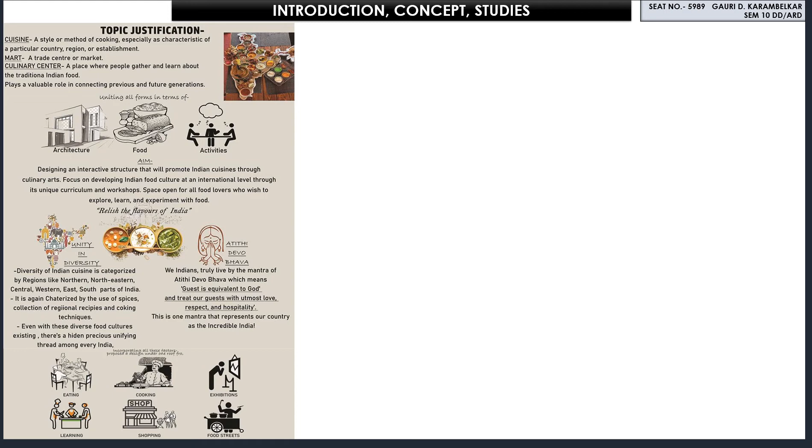Aim is to design an interactive structure that will promote Indian cuisines through culinary arts, focusing on developing Indian food culture at an international level through its unique curriculum and workshops. The space is open for all food lovers who wish to explore, learn and experiment with food. These are more of the social and national, international reasons.

Concept: as we know, the Indian subcontinent comprises 6 administrative divisions, so resembling of triangles concludes into a hexagonal form. Keeping in mind future expansion, this form can easily be adopted.

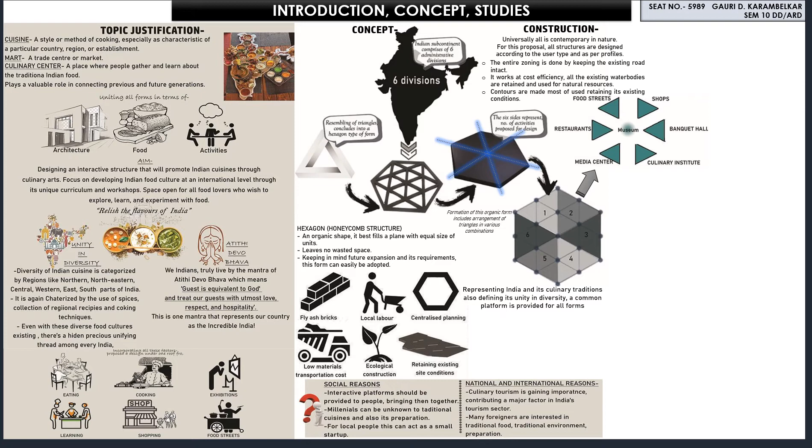Construction is universally contemporary in nature. All the structures are designed according to the user type and as per profiles. Zoning: the program is related to all age groups, local vendors, food related organizations, students and chefs.

Electives: 3 topics have been studied as an add-on — smart technology and its role in restaurants, organic waste management, and green restaurants. So this process includes aspects such as physical, social, cultural, economical, spiritual and aesthetic place.

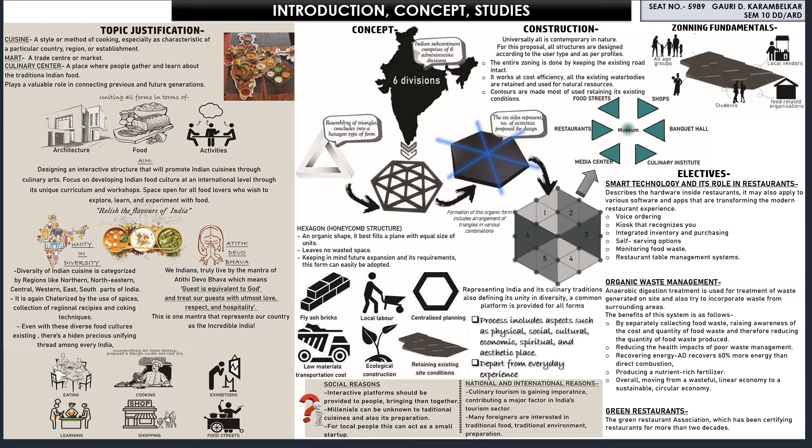Depart from everyday experience — site conditions. Creating a culinary hub requires more visitors with varying profiles. Selecting a site adjacent to main connecting city highways provides chances of increase in the number of visitors. Site potentiality depends upon the thoroughfare potential, surroundings — natural as well as man-made — future proposals, and more accessibility options. Previously, 3 sites were taken into consideration.

One at Mumbai-Pune Expressway, second at Mumbai-Goa Highway, and third at Mumbai-Agra Highway. Considering accessibility, proximity to nearer cities, transport services, natural surroundings, and daily number of vehicles passing from the adjoining road, the site at Bhatan and Bhinganwadi was finalized, which is on the Mumbai-Pune Expressway.

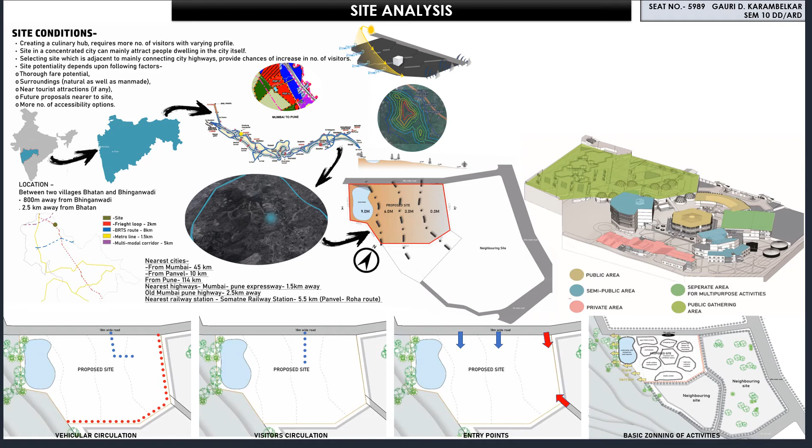Site zoning in terms of public, semi-public, private and other areas is explained. These are some of the site images surrounding the site. Vehicular circulation, visitor circulation, entry points and basic zoning of activities are explained graphically.

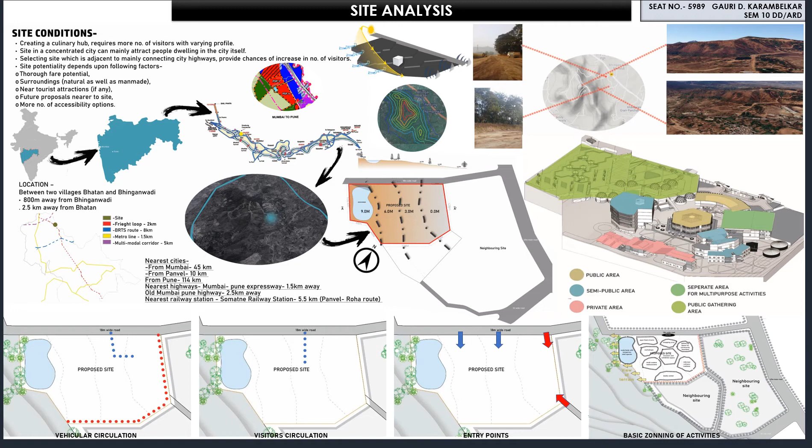A detailed site description with natural and built surroundings is shown. Further site components such as green spaces, services, parking, water bodies with built forms are marked. Interventions from climate analysis in the design are explained.

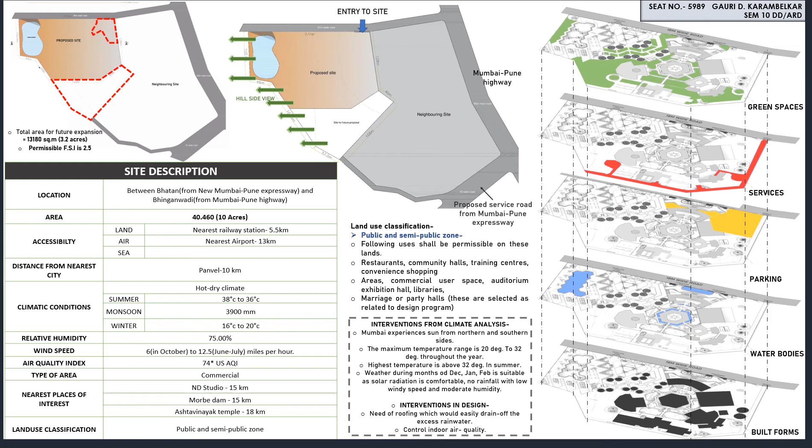Site zoning, showing pattern grid for planning with reference to triangular arrangement. Site with contours; further the site is divided into 6 parts.

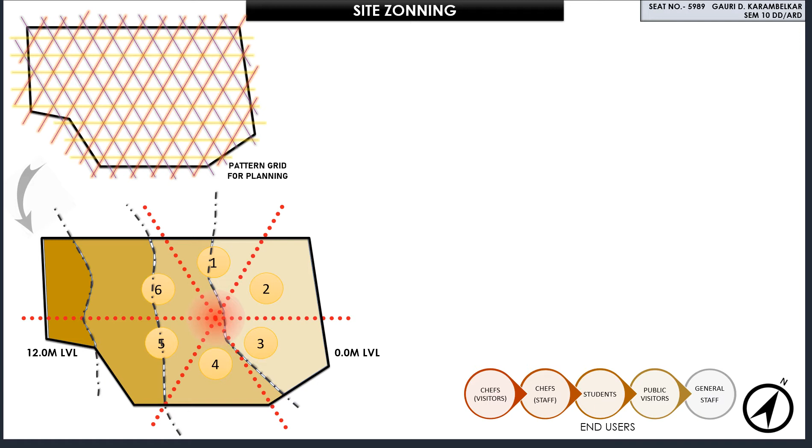Moving towards the zoning of the site, starting with the entry to site at 3-meter level, the main road leads towards the parking at 0-meter level below the banquet. After parking the vehicle, the visitor will come at the 3-meter level and start from the shopping arcade.

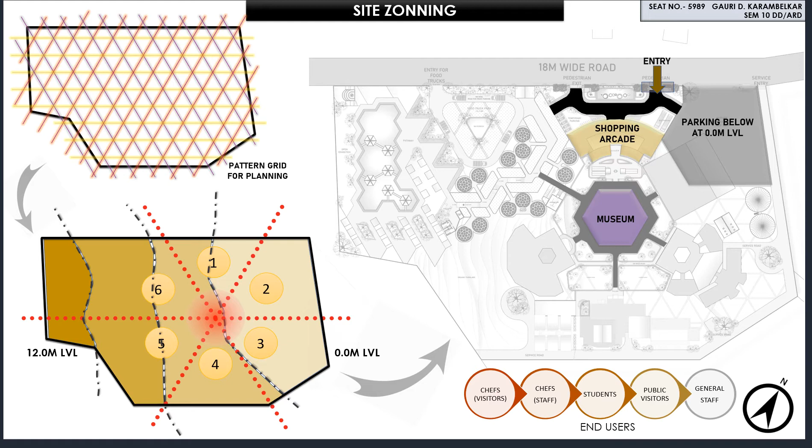Moving straight through, a person will enter the museum. This is the main road surrounding the museum, that is, the pathway towards all other structures from the museum itself. The banquet has a separate entry and exit, so a person need not enter the museum.

Culinary Institute, Media Center, restaurants, food truck park, water body with temporary shops. Exit again at 3-meter level. This is another entry-exit for the food truck park. A service road connects all the structures at the backside.

Sub-temporary parking spaces — as the site is on the main highway, a person can come only to the restaurant, grab a bite and go. These are small pockets for buggy vehicles and bicycle parking, as well as recharge stations. Overall, this type of zoning shows versatility and variability of activities.

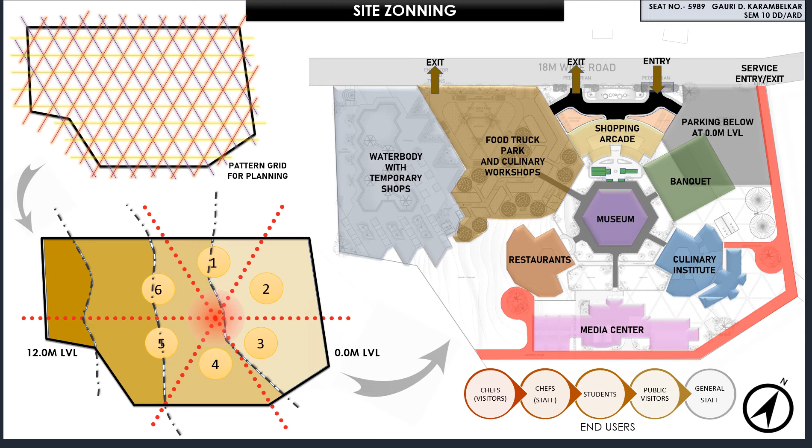Site plan with roof — this shows detailed roof profiles of all the structures on site. It explains the built and unbuilt ratio on site. Mostly, all the structures are designed with flat roof and contemporary facades as per use.

Contour levels and hierarchy of the structures are considered. Organic farms with vacant land are with respect to the contours. Besides, there is an activity mapping for the whole site.

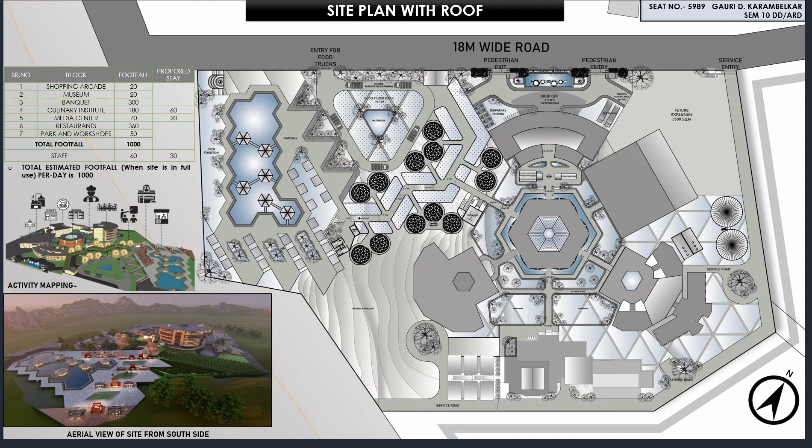Site ground floor plan showing structures and their arrangement according to the contours. It explains the overall circulation pattern.

With reference to the footfall calculations, further parking calculations are carried out. Valet parking is proposed for visitors, with 160 four-wheelers and 52 two-wheelers.

A separate entry and exit with a drop-off point for outside vehicles is proposed. The parking layout includes a lift and staircase to access the upper levels.

The entrance area at 3-meter level includes entry and exit to the site with a pedestrian pathway and drop-off point. It also includes valet parking registration rooms on both sides.

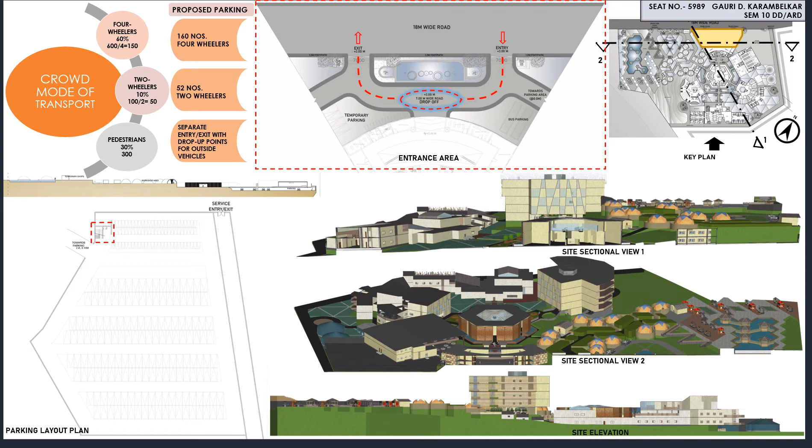Site sectional views, with one site elevation from the back side, showing the hierarchy of the structures.

Shopping arcade — the first block after entering the site at 3-meter level. This shopping arcade includes specialized shops related to the theme. A person starting his tour through this block gets an overall idea. This arrangement increases the sellability factor.

It also has an admin office and control rooms. The ground floor is the stop point for visitors right after entering the structure. It consists of ready-to-eat traditional spices, raw product shops, and first aid facility.

The administration area is proposed at the back side of the arcade. The first floor is an extension to the arcade, and it consists of books, textiles and cutlery shops.

Semi-open sloped roof for the courtyard space provides natural light and ventilation to the interiors of the structure. The facade is treated with a wooden textured perforated metal jali, detailed in the ARD. The front elevation shows this facade treatment with perforated metal jali placed vertically.

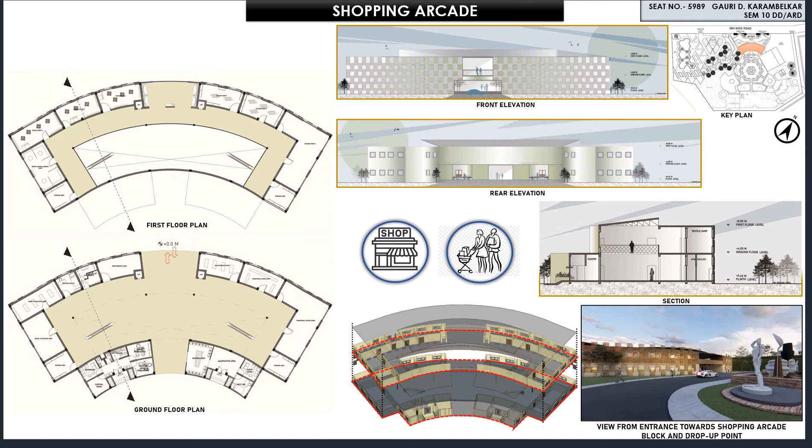The rear elevation shows entry to the back-end admin office and arcade. The section shows the central courtyard space with shops arranged around it.

Culinary Museum: centrally located, the museum reflects uniformity from all sides. Its facade is treated with slightly tilted perforated metal panels, and it is surrounded with an artificial water body that creates a pathway to all blocks on the site.

The ground floor consists of seminar rooms and exhibition spaces, more concerned with learning, and this museum provides access pathways to all blocks on site. The first floor consists of experimental activities such as smell synthesizers and tasting bars, with AV rooms giving a digital platform to the culinary aspects.

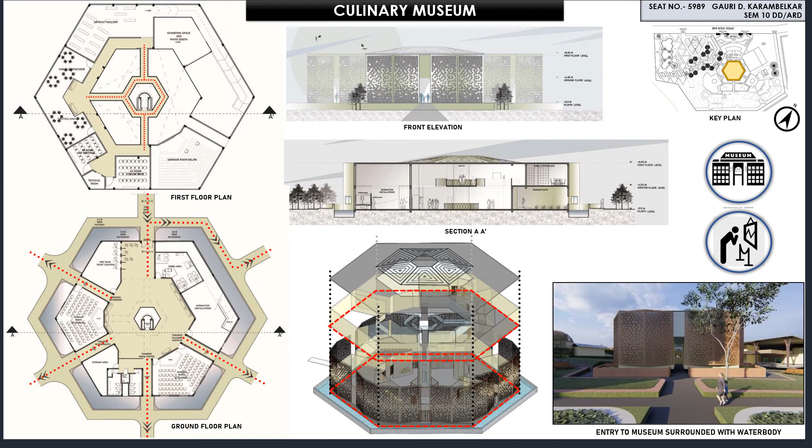At the end of the tour, access is given to the exhibition space and museum on the ground floor. Floors are vertically connected with a glass capsule lift, and a central glass covering acts as a courtyard bringing in natural light.

The front elevation shows facade treatment with perforated metal jali. The section explains the exhibition space with double height and a ramp. The central space has a glass lift and walkway towards other structures, along with a seminar room and activity area.

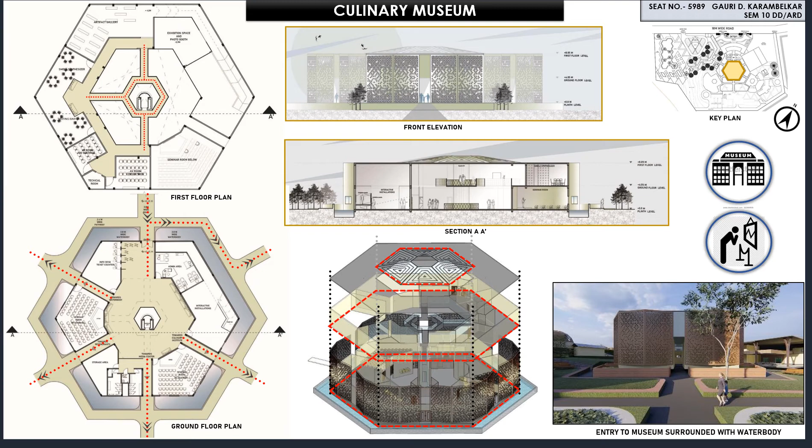Banquet: proposed above the parking area at the 3-meter level. This block is restricted for entry and exit from other structures on site. It has a banquet hall, part of the food family, with an extended multipurpose space.

The ground floor includes foldable, moving acoustic partitions so the space can be used as required at specific times. There are two banquet halls with 150 seatings each, and two kitchens serving the respective banquets.

Dining arrangements are in the exteriors, with green rooms at either side of the space. The first floor has an increased multipurpose space with dining arrangement.

A perforated polycarbonate sheet is used for the roofing system, with V-shaped steel columns supporting the roof for aesthetics and stability. The sectional view shows seating for both floors and the green rooms, while the elevation shows the V-shaped steel columns and the dining arrangement at the front side.

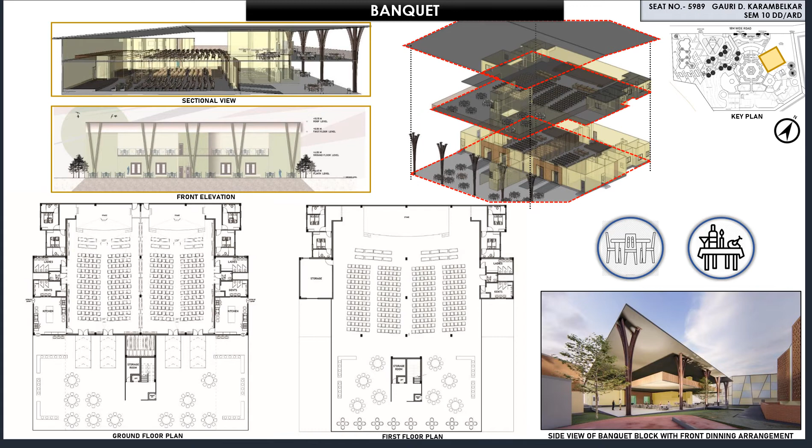Culinary Institute: entry at the 3-meter level. This block includes activities for experience and theory related to cuisines and their Indian origin. The plan at the 0-meter level has an internal entry through the block.

It has a semi-open amphitheater with green panels, surrounded by greenhouse organic gardens. The ground floor level serves as the entry and exit to the structure.

It includes a demo class area, classrooms, an admin area on one side, and restrooms on the back side. This is the learning or theory area.

The first floor level includes culinary workshops, a conferencing center, and a cafe space, with the admin area on the front side and restrooms on the back side. This is the experience or activity area.

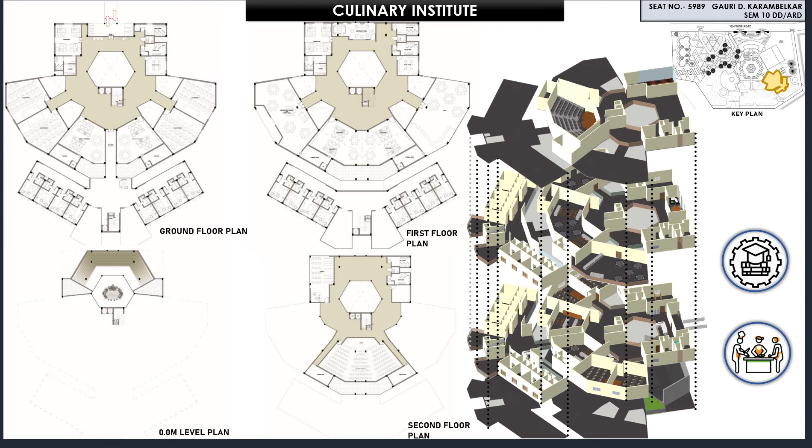The second floor level includes an auditorium, known as the culinary theater, and library facilities, being more private spaces. The rear elevation shows the backside visitor's room facade.

The front elevation features random glass panels with wooden frames. Sectional view A shows the amphitheater and the demo classes below it.

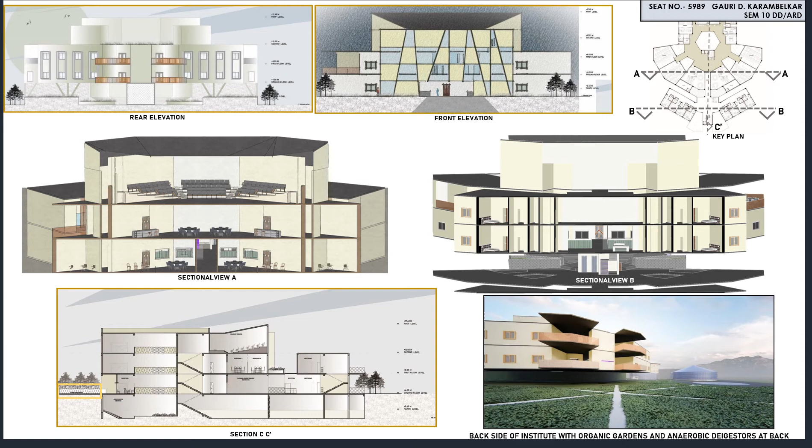Sectional view B shows the restrooms and a pathway towards the main block. Section C represents a bridge towards the entrance area, leading further to a common courtyard space. An image shows the backside of the institute with organic gardens overviewing the anaerobic digestion plants.

Media Center: media cookery shows can be held here with proper training and cooking competitions. This block includes a residential wing for chefs with 6 rooms, residential rooms for participants or visitors with 18 rooms, and a well-facilitated media center with proper storage areas and multipurpose space.

A colored zoning is used for better understanding, with an open dining space and entry area with conferencing spaces, residential rooms for chefs and visitors, and technical rooms with media spaces and proper storage areas.

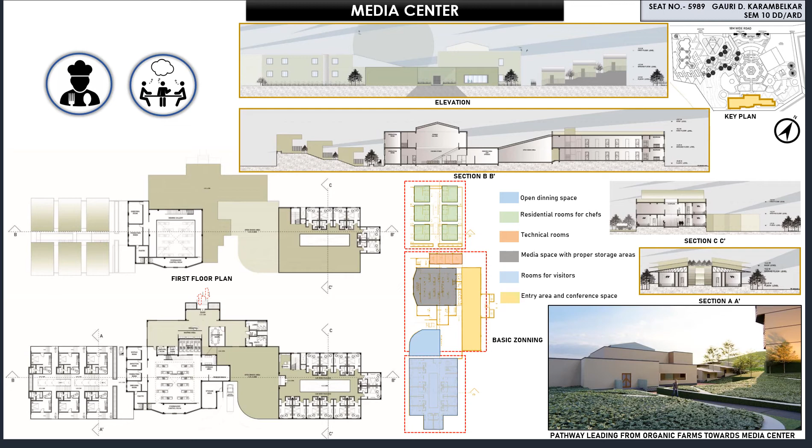The front elevation shows all three sections of the media center. Section A is from the rooms for chefs. Section B views the media room with the visitors' residential area. Section C is from the residential wing for the visitors.

Restaurants: entry at the 6-meter level. The concept for this proposal lies in its success over a prescribed period. The representation of states will also reflect in the surrounding activities provided in every block.

Proposed plan: in this culinary platform, restaurants play an important role in delivering experiences through the food served. Three restaurants are proposed on one floor, totaling 12 restaurants at a time, so as to display all types of Indian cuisines under one roof. In total, 36 restaurants have been proposed, representing all 36 states and union territories.

By preparing a calendar, these restaurants will change character according to the changing states and their requirements. The changes would happen 3 times a year, that is 12 restaurants times 3 rotations out of the 36, so each restaurant works for 4 months in a year.

These changes can be applied using changeable artificial environment scene creators, that is, hologram panels. The plan at stilt level includes a ramp towards the exhibition wall panels.

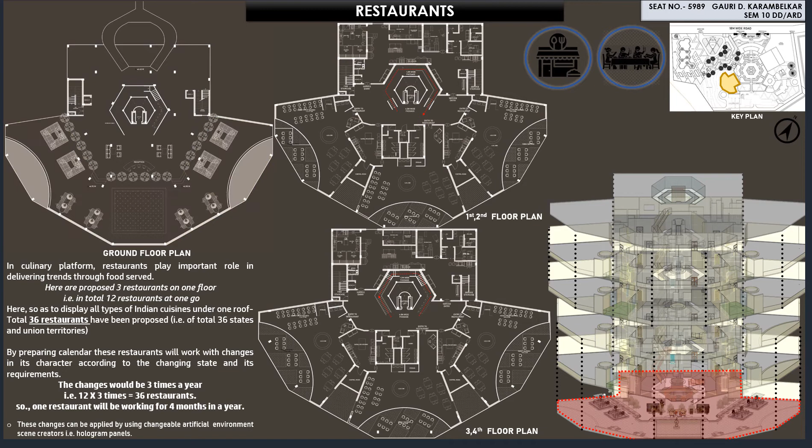A central capsule lift is provided for vertical transportation. Further, a roam-around space is provided for visitors to get prior information or suitability before visiting a particular restaurant of its kind. The first and second floors have a main kitchen on one side and two satellite kitchens serving the restaurants.

There are 3 restaurants on each floor. The third and fourth floors have the same arrangement with some increased space for the restaurant on the front side, which acts as a shade for the lower floors.

Terracotta baguette sunshading devices are provided on the back side of the restaurants. Three restaurants are arranged on the back side, viewing towards the organic farms and hills with natural vegetation.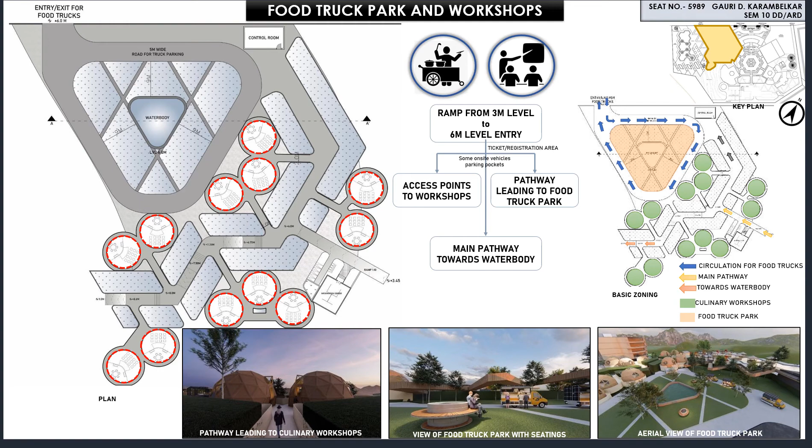Water body with temporary shops. Entry at 9-meter level is more of an informal type of area with a water body besides temporary shopping spaces such as huts and open exhibition spaces.

A bridge leads to small amphitheater seating so as to enjoy the surroundings with the built form. This area can also be independently accessed through mid-level on-site, and it can be open at all possible timings of its use.

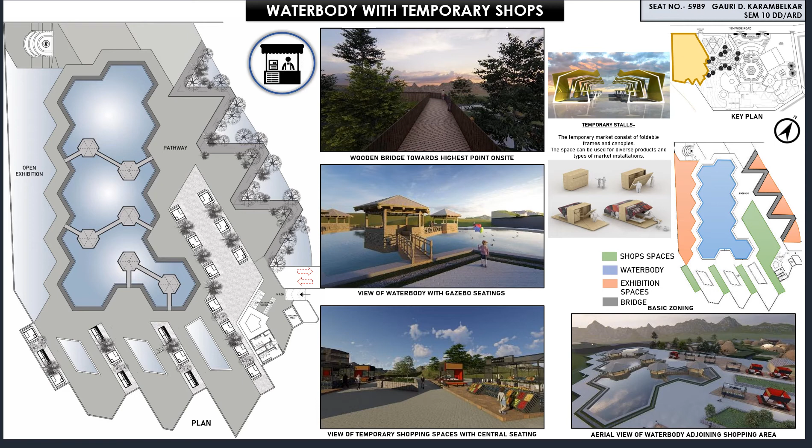Here ends the design part, and now starting with ARD details. Footing: as the soil bearing capacity is 150 to 250 kN per meter square, isolated footing with shallow foundations of depth 1.5 meter is used.

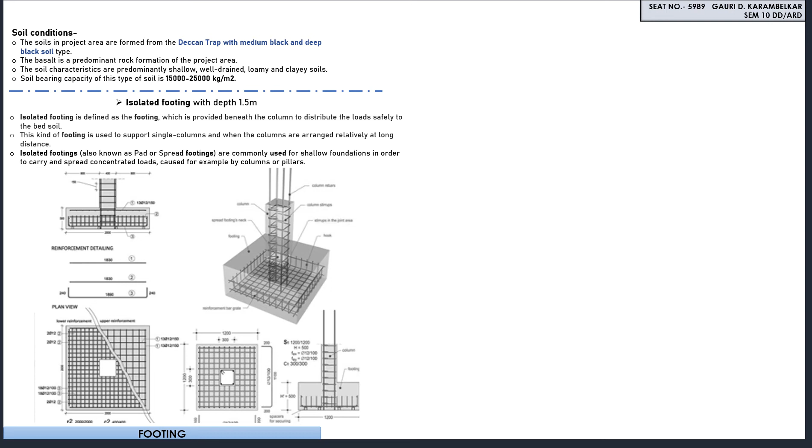Fly ash bricks are used for construction which has better properties than clay bricks. This is a step forward towards green construction.

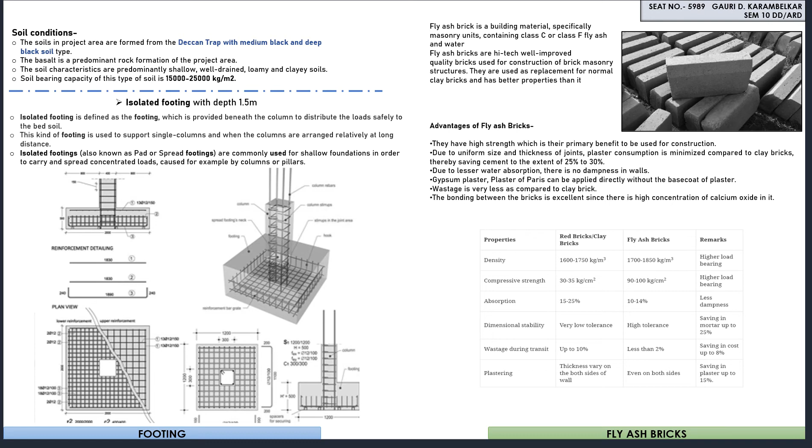Further calculations regarding water supply, sewage treatment plant, rooftop rainwater harvesting, electric load, recharge pits and water distribution have been carried out. Building integrated photovoltaic panels.

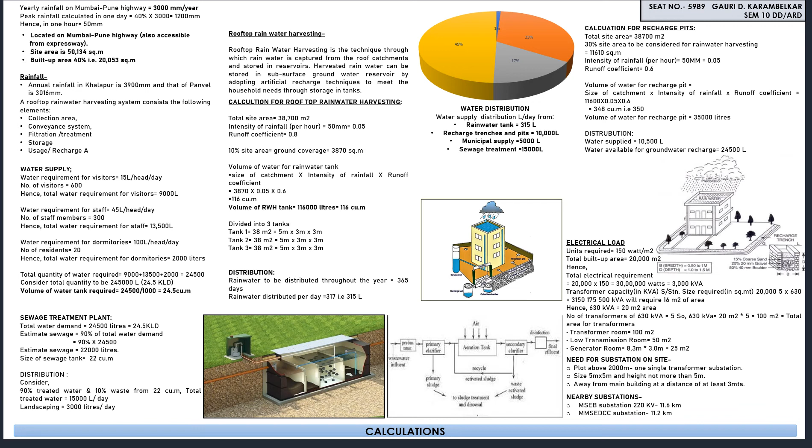A dynamic facade for building exteriors includes building integrated photovoltaic panels. They are used for roof, skylight or facades. Site at Mumbai-Pune Expressway, area of installation is 2000 square meters.

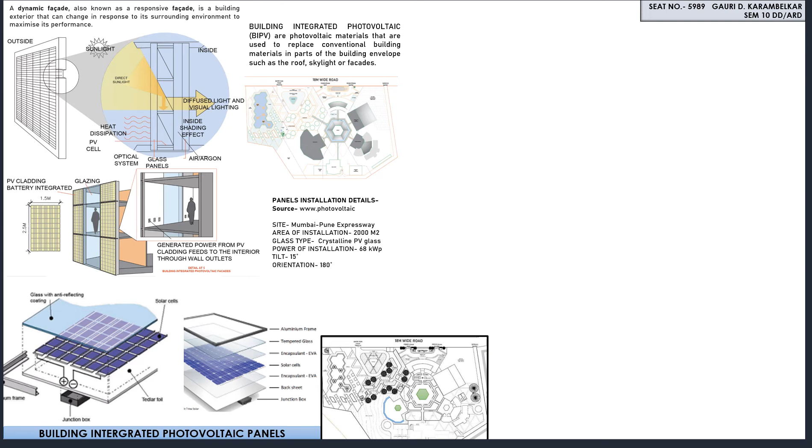Glass type is crystalline PV glass. They are tilted at 15 degrees. Orientation at 180 degrees. Capsule lift details.

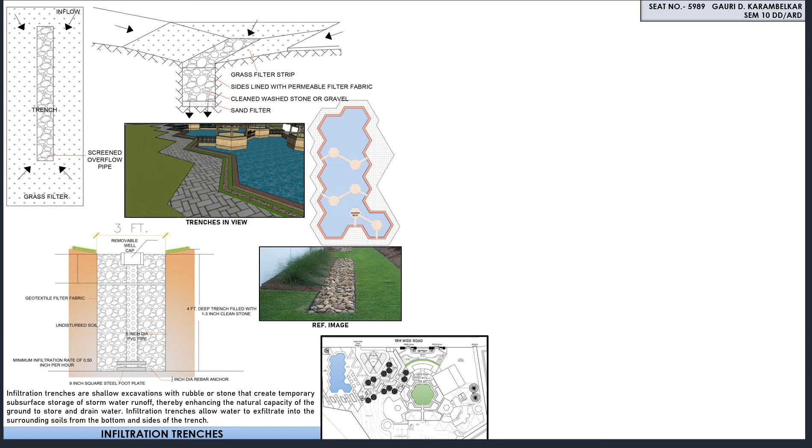Infiltration trenches are used as shallow excavations with rubble or stone that create temporary subsurface storage for stormwater runoff. They are used at the water body which is retained.

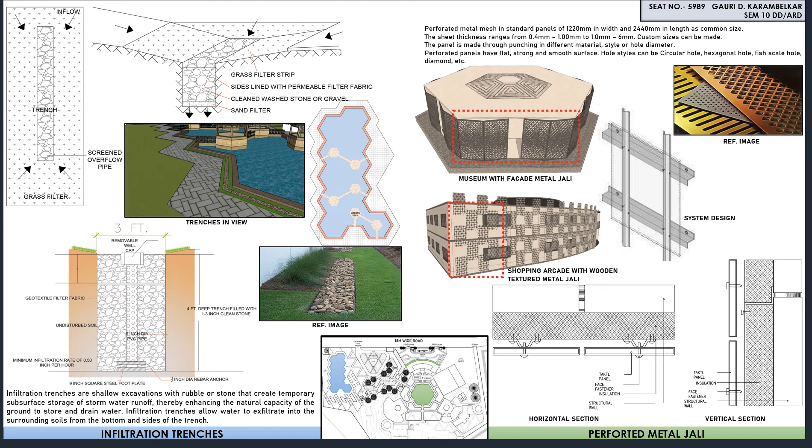Perforated metal jali: museum and shopping arcade are two blocks treated with perforated metal jali. It is 1220 mm in width and 2440 mm in length. These are the details for fitting panels.

Terracotta baguette: terracotta baguettes are fixed horizontally on the backside of the restaurants. A back fixing system is used in which the baguette is drilled on the backside and fixed by a back bolt through the inside and outside of the baguette body. Geodesic bamboo dome.

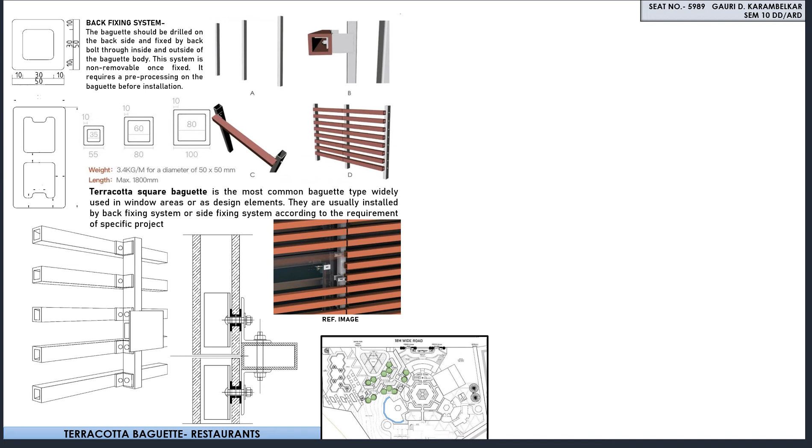Geodesic bamboo domes which are used for the workshops are envisioned to serve as temporary spaces. They are fixed with ball joints snapped in and out. Ball joints are screwed onto any wood or bamboo material.

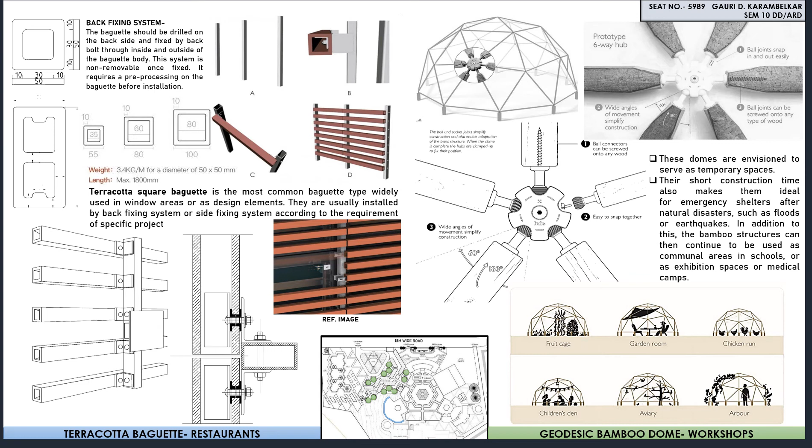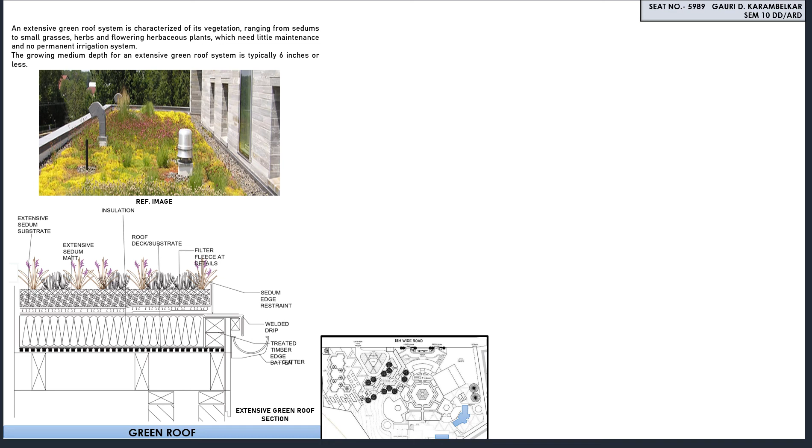Green roof: an extensive green roof system is used for roofs at the media center and institute, which has less maintenance and no permanent irrigation system. Here is the detail section of the layers.

Retaining wall detail: as the site is contoured, a retaining wall system is used as required. Water body detail: the water body which is retained with gravel or planting on edges and concrete and rock edges has been explained with a detail section.

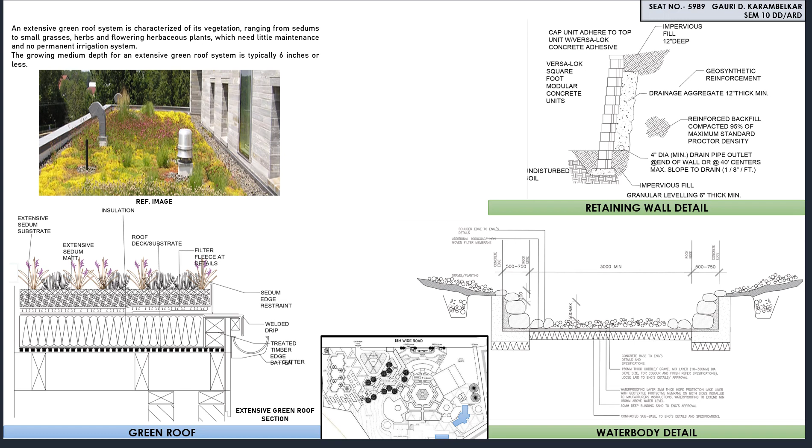Concealed traps and out channeling system is used at the food truck park where wastewater outflow is necessary. Here are some detailed sections through the traps.

Hologram display screens for restaurants combine projection technology with 3D animation and build a dynamic and changeable environment scene, with the dining room wall, curtain detail, desktop, ground and ceiling as projection carriers.

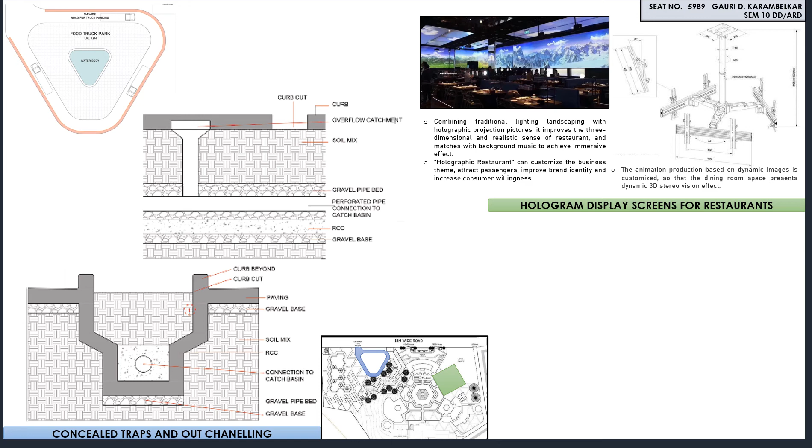Folding acoustic panels are used for banquet partitions for changing it as per use. It includes a room for folded panels at the end.

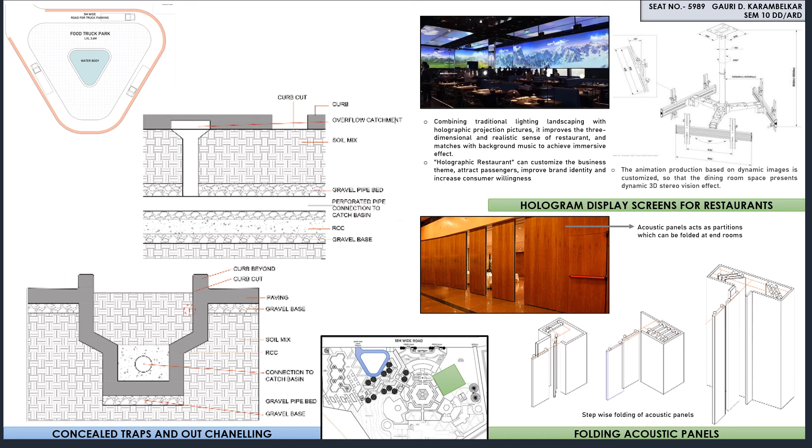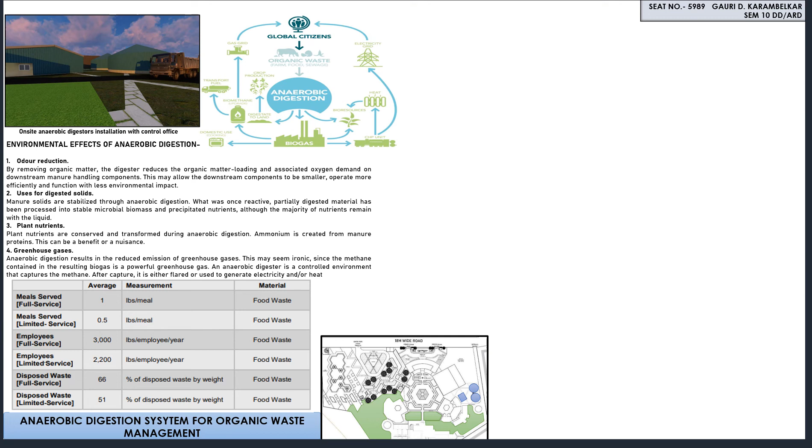These are some green initiatives in the design. First is an anaerobic digestion system for organic waste management, which has effects such as odor reduction, uses for digested solids, plant nutrients, and greenhouse gases.

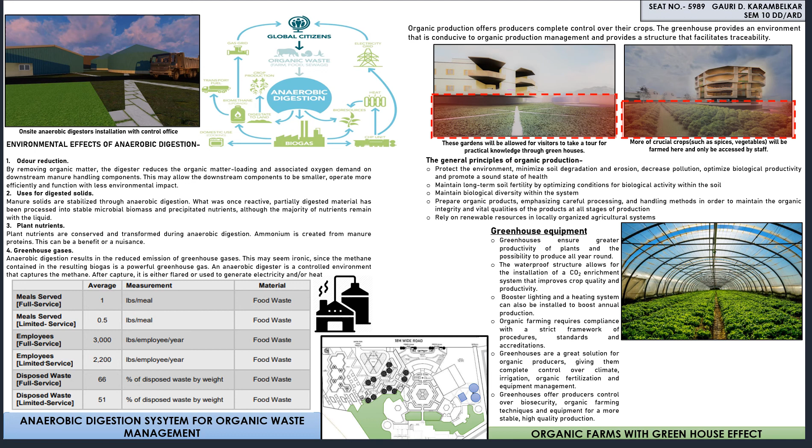Second is organic farms with greenhouse effect. It increases productivity, as all types of plants can be managed under controlled environments.

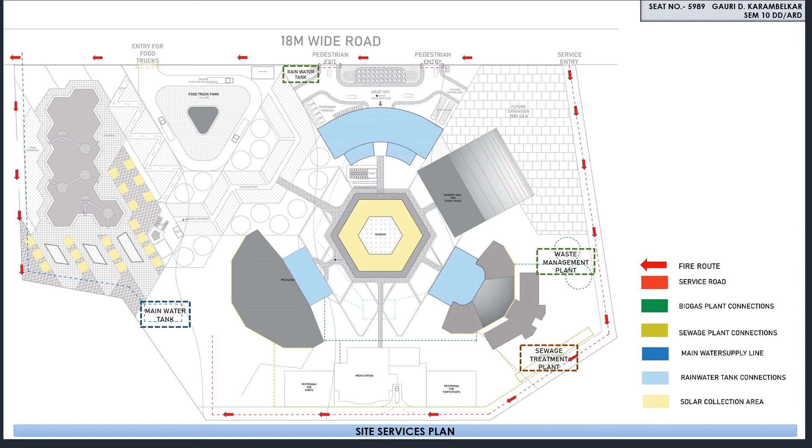Site services plan with service road, biogas connections, water supply line, rainwater collection areas, and solar collection areas has been shown. Starting with walkthrough.